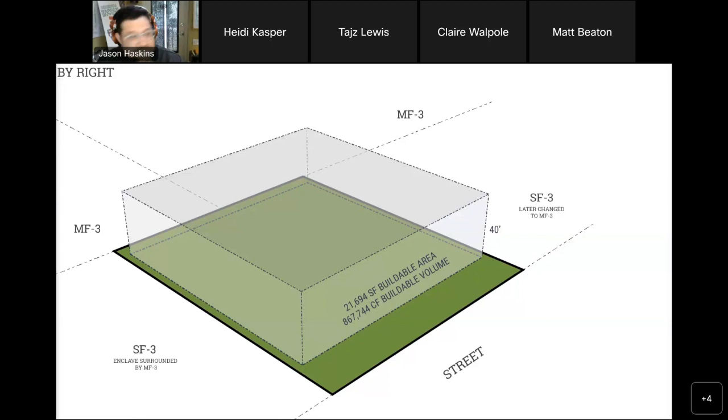Here is what the buildable area by right of the zoning base district should be. This is essentially two single-family or SF3 lots next to each other. It was already zoned MF3. And here's what the compatibility restrictions do to that potential volume. In this case, the buildable volume was reduced by 36%.

And I should also mention that the property to the north was changed to MF3 during the design process, but the existence of the house on that lot would still have triggered compatibility. When the house was demolished during our construction, it would have been too late to get back the area that was lost. Here's the existing building compared to the compatibility limits. It sticks out on both sides and the back.

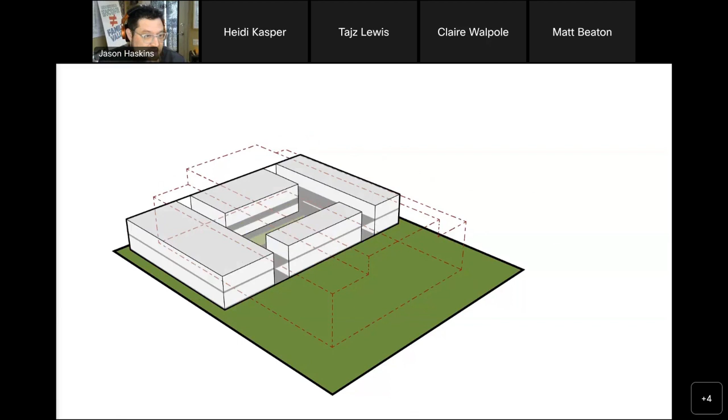And this only provides 20 units as they were using it. It was originally 22, and they converted 2 of the units to the office and lounge, and that's what they were using as the support space and the amenity space.

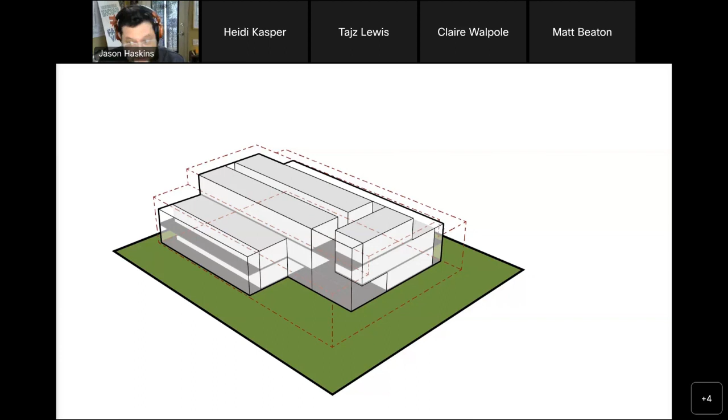We did try very hard to find ways to squeeze the desired number of units into the compatibility envelope. And this is sort of technically 40 units, as long as you don't want daylight in the units or the courtyard, which is the only thing that the residents actually liked about the old building. It decreases the security in a number of ways, and really, even for any housing, not having windows is just a non-starter. But when you look at the literature about the importance of daylight and access to nature in healing for this community, there was no way to make this work.

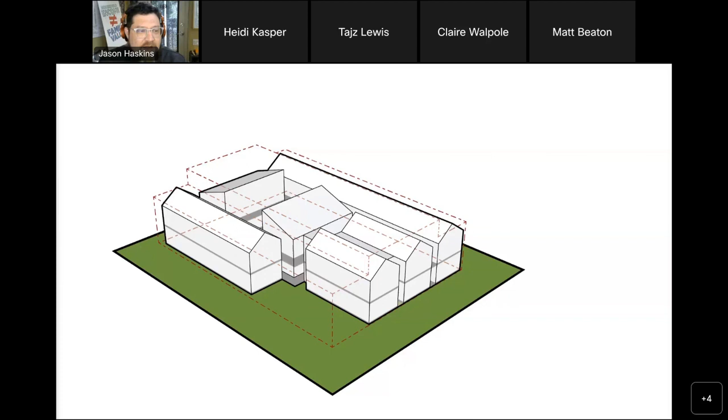This we actually did after the fact, just out of curiosity. So we took the final design and kind of modified it to fit within and try to squeeze every unit out. And by decreasing the service spaces available and decreasing some of the other features, we were able to get up to 26, which is still short of the goal.

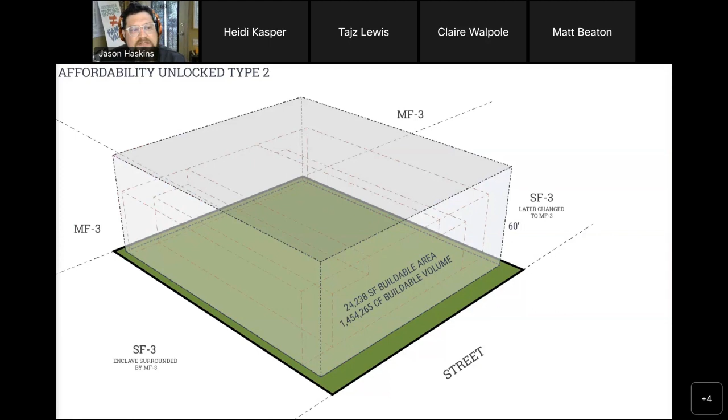So now compare the Affordability Unlocked envelope on this site to the compatibility envelope to the Affordability Unlocked Type 2 envelope, which through the height increases and through the modifications to the setbacks becomes a 67% increase in the buildable volume. I'm talking about volume here because it takes more into account than just the area. As we tried many different iterations, the volume really is what allows you to have the quality of the units and reinforce the dignity of the housing.

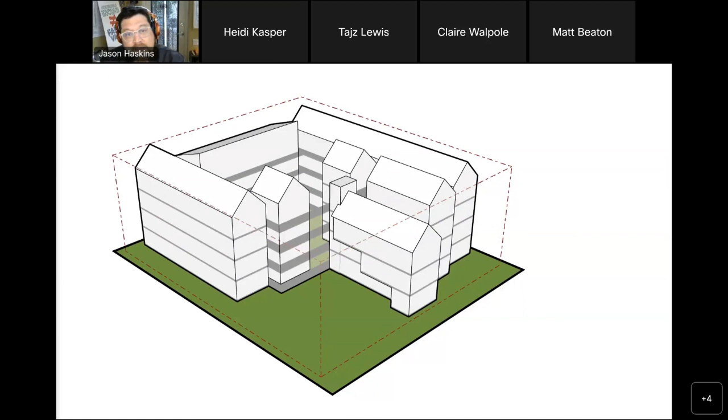This is a version of the plan that actually uses the entire height bonus, which would allow us to go up to 4 stories in this case, again, because we are providing 100% affordable, all at 30% MFI. And we could have gotten up to 60 something units in this plan, but that's not what was appropriate for the site, not what was appropriate for the program, not what was balanced out by the funding that was available, the parking ratio they knew they wanted.

So basically what Affordability Unlocked allowed us to do is to build the correct building for the residents and for the organization, what they can afford, what they can manage, what provides the best service, the best quality of life for the residents. We didn't have to worry at the end of the day about meeting arbitrary numbers. For example, we would be allowed by right 23 units, and you could build the same building with 23 large units, or really normal size 2-bedroom units. But because what's appropriate for this population is very carefully tuned micro units, we were able to fit 40 in what was the same area.

We ended up only using 18 inches of the additional height that's allowed, except for the compatibility. And really that was just to provide the 12-12 pitch, which I think really helps give this a domestic character. And it is actually almost humorous how much worse the building looks with lower pitch in this design.

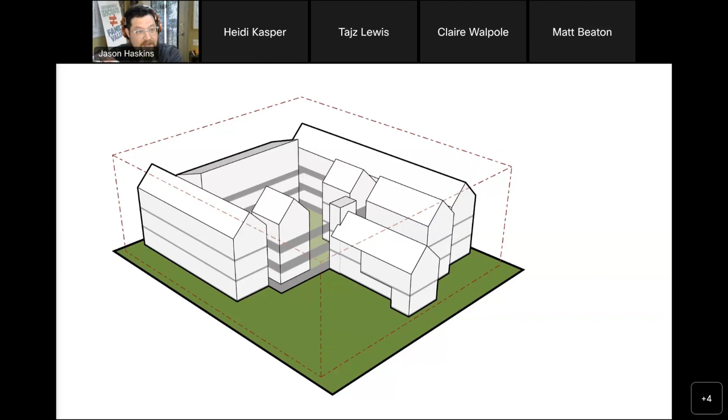We reduced the parking spaces to 14, 4 of which are accessible, with an option for another 2 to be made accessible. That was based on the ratio they had before, because they knew which of their current residents had cars. They doubled that and then added a couple of spaces for the increased frequency of off-site visiting service care providers coming to the site. Obviously, that's not going to work for everybody, but in this case, it allowed us to worry about what was appropriate and the most beneficial to the residents.

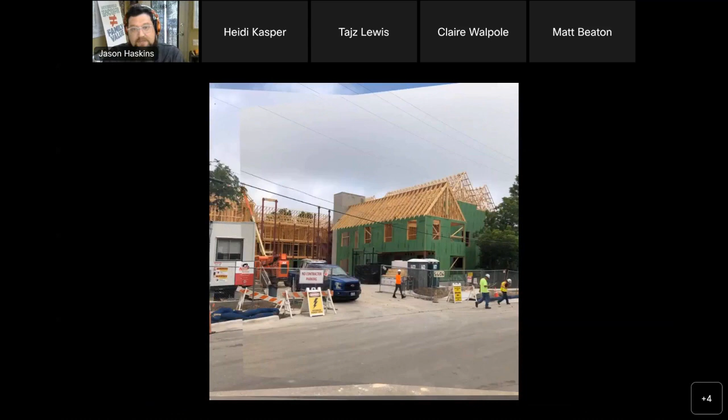So with all of that sorted out, with no rezoning required and no other cases, we were able to proceed with construction. All of the residents were moved together to another building. And then, as I mentioned, this was built during the least ideal time during the pandemic. And really it was the collaboration of the team and the flexibility that really made this happen. Also having the strong goals that we set out and things like the AEGB worksheet to go back to as principles really helped in the decision-making process and some difficult decisions.

So we had our ribbon cutting and residents started moving in last fall. All of the residents who were here before were able to move back in pretty much right away. And then the other half of the units have been filled up. There is currently one unit not occupied and it's already claimed.

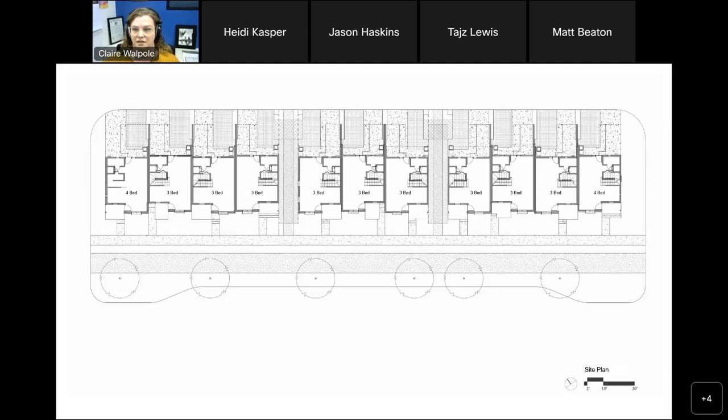Ken? Yeah, thanks, Claire. That was awesome. I want to say that projects like this do take a big team, like Jason said, and Habitat having design, construction, and ownership all under one roof and accomplishing these goals is so impressive. The feedback that we got working with Claire and then with Austin and Billy on site, the superintendents who had a background in custom residential housing, contributed to solving a lot of the design challenges and achieving the designs that we were looking for.

And so I wanted to talk about how these fit into our firm's design ethos, which is that design is for everyone. And so you can see an example here, and I just love all the after photos with the families standing on the individual porches, and that was really the intent for these 11 homes.

While they are attached single family, which is a style of home that we're not especially used to in Austin, it's a necessity, especially for something as close to as many amenities as this. There's a park right across the street. There's an HEB a block away. Elementary and middle schools are right around the corner. It's a really great place to live, and offering that opportunity to as many families as possible is amazing.

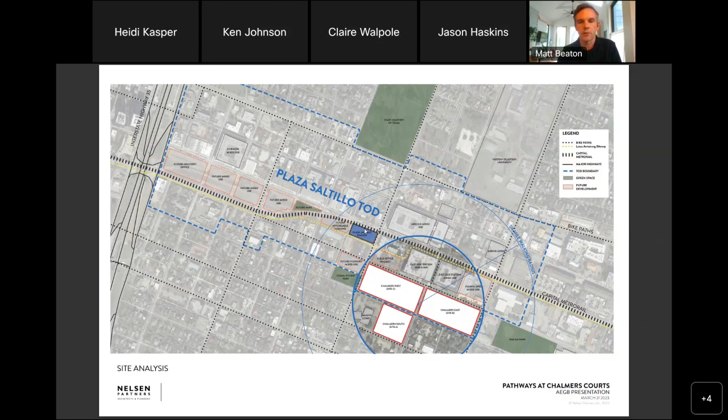This is the project here. It happened in 3 phases. I think we started in 2017, and we're currently building out Chalmers West, which is the 3rd phase, right now. So if you go there now, it's about half done. So in 2017, we built Chalmers South, and this was before Affordability Unlocked. So even before that ordinance came through, we were able to get this site rezoned and work with the city to reduce the parking.

So back up. The original Chalmers was on these 2 blocks right here. This is HACA-owned property that had a clinic building on it that we demolished. The original site had about 140 units on it, and the full build out will now have 403 units. So we've more than doubled, almost tripled the amount of affordable housing on this site, which we're really proud of.

But the basic idea of the plan was, you can see all the heritage trees in kind of dark green here that we designed the buildings around. Each building is centered around a central courtyard. We tried to break up our parking into smaller chunks so that we could have some uninterrupted green space on each block. So Chalmers South was first.

We have this U-shaped building around this courtyard. Chalmers East was second. What's unique about Chalmers East is we retained 2 of the existing buildings and converted those into a dental and a medical clinic for the residents and for the neighborhood, and then built the rest of the buildings around this courtyard.

And then Chalmers West is being built the same way, but on 4th and Comal, we're going to actually have some small retail, and we're trying to find some partners with the housing authority that could be retail that could actually serve the residents in that corner, and that's right across the way from Plaza Saltillo.

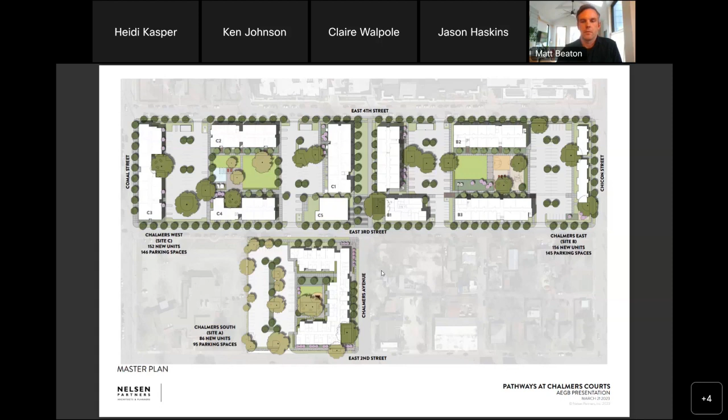So this is Chalmers South. I'm going to go a little quicker because I know we're running out of time. So again, there's 87 units here. We ended up getting it up to about 90, 95 at the end, but yeah, C shapes. And we try to break the building apart into masses too.

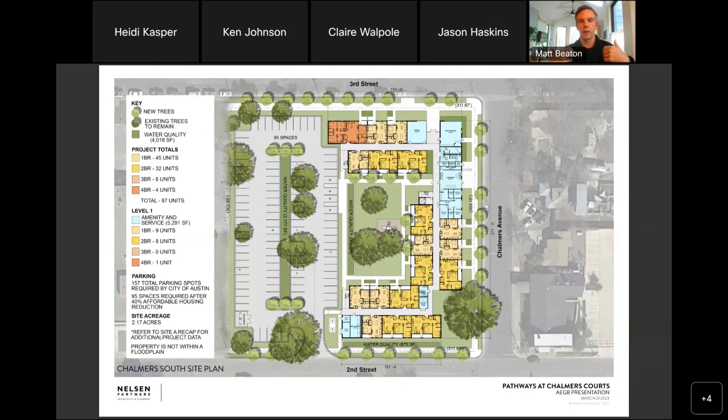And so instead of just building a C-shaped mass, we carved out for heritage trees, for breezeways. These are all exterior breezeways. We wanted to keep air movement, light and fresh air through, and access to views all the way throughout. So you'll see that in all the projects. We always try to find a way to carve out the masses to kind of respect what's going on the site.

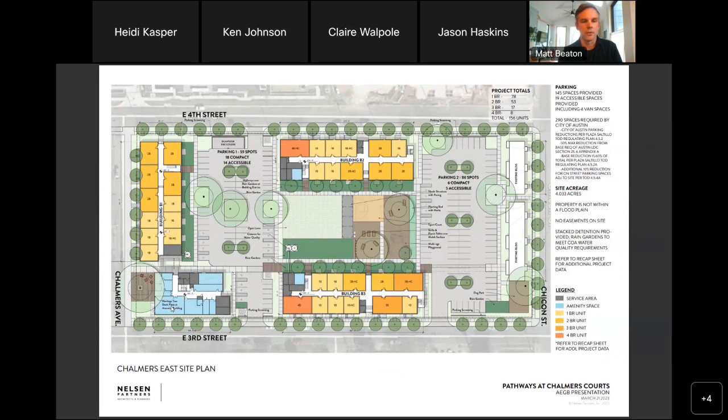This is Chalmers East. You can see the existing buildings here, and then a first floor amenity space here. Right now, this houses the Boys and Girls Club in this corner. And then this is West. This is a standalone. This is going to be kind of the flagship amenities for Chalmers here at this corner. And this will have the Boys and Girls Club. It'll have art rooms, classrooms, spaces for service providers, and all kinds of fun stuff for the Chalmers residents. And it's sitting prominently right there on the corner.

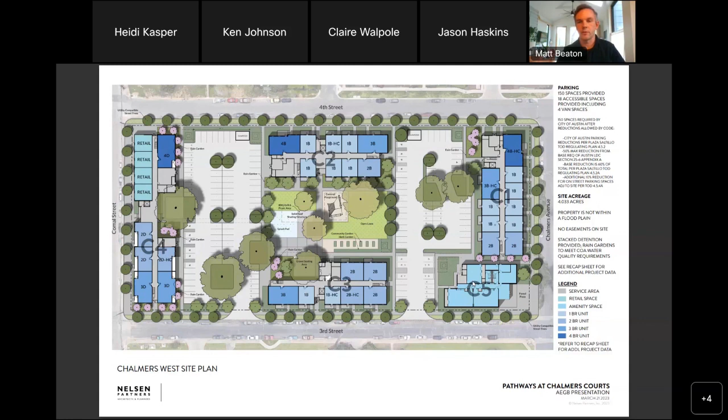So specifically for AEGB, we've been partners with AEGB throughout this process. For South, we got a 2-star rating. For East, we got a 3-star rating, and we're hoping for a 3-star rating on West. We're working through that right now. But a big part of how we got there was, again, it's an urban site.

I think like some of the other presenters, Ken and Claire and Jason, were saying the same thing, where the place where you put your building matters a lot, and that can really count a lot towards sustainability just by nature of its connectivity to other things and its contribution to the public realm, as Ken said. So I think this is a really strong point for our project.

We were able to get full solar on all the buildings for South and East so far. We're hoping for West. We've got solar ready on West. We're working with Lighthouse Solar to work out a program for West that can provide PV panels for that as well.

We're producing more power than the building needs from a design standpoint. We are tracking that in real time, so we'll have more data on that in the next year or two to see how things are really performing.

But this is a great example of how distributed solar over a large project like this can really benefit a project. Even when we're talking about it during development, we're working with limited budget, limited constraints. We don't want to add a lot of bells and whistles that don't really contribute to the well-being of the residents just to get points. But this one actually turned out to be a really healthy ROI for the investment.

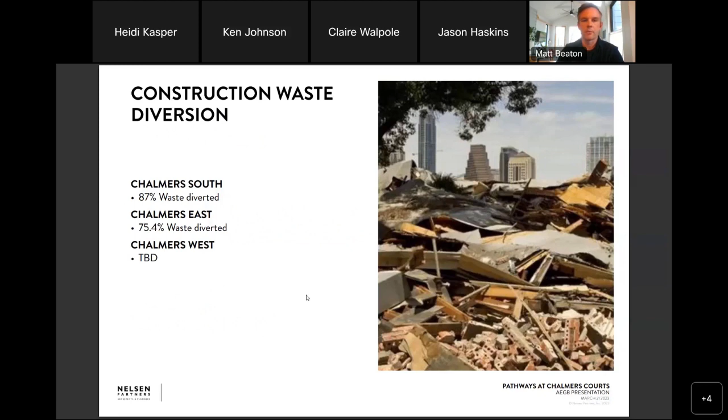So I guess, talked about lessons learned and main takeaways. We've been working on this for several years now, and we kind of try to do a little bit better every time we push one of these phases out. As I was saying before, since we're not seeing as much of a return for the energy performance, we're starting to look into continuous insulation. Even though you can do an energy model and prove that you don't need it, the codes are probably going to start changing, and that's going to become less and less of a possibility. So providing a little bit more insulation, a little bit more robust envelope could help us a bit.

And we're starting to look at more early stage analysis, looking at window wall ratios, doing some early iterations and energy modeling. Typically, we do an energy model - the reality of the game is that we do an energy model sort of because we have to. We get it spit out, but we don't use it as an iterative tool.

We haven't been, but that's something that's changing in our practice, doing additional commissioning so we can understand how these projects really perform in the real world. It's one thing to do your worksheets and get stars for AEGB, but we're really interested in what the data shows, and we're going to be tracking this with the Housing Authority over the next few years to see how things are functioning and how we can do better on our future projects, which are Rosewood Courts and Santa Rita Courts, the next projects we're collaborating on with the Housing Authority.

So that's pretty much it. We had a lot of great partners, like I said, the Housing Authority, and then Carleton Development. We had TWG Landscape for our landscapes, and then PHA, MEP, and Connect Structural out of Dallas. So it was a great team. We've been working with the same team all the way through these phases for 5 to 6 years now, so it's been great, and I'm glad to be able to share this with you guys. Thank you.